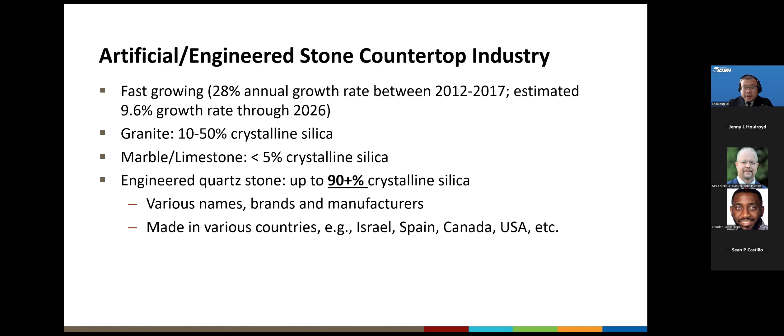So what we have been doing in NIOSH, I just want to present how we came along in NIOSH with our research tackling this problem. Shortly after the first case reported in the US in 2014, we had an HHE request. We did this health hazard evaluation in a relatively large fabricator shop. And the key finding was that the workers using handheld grinders with a traditional water spray wetting method had the highest exposure. You can see the number highlighted here, about 121 micrograms per cubic meter. At that time, OSHA's PEL had not been updated yet, but this was still higher than the then PEL. Of course, more than double the current PEL.

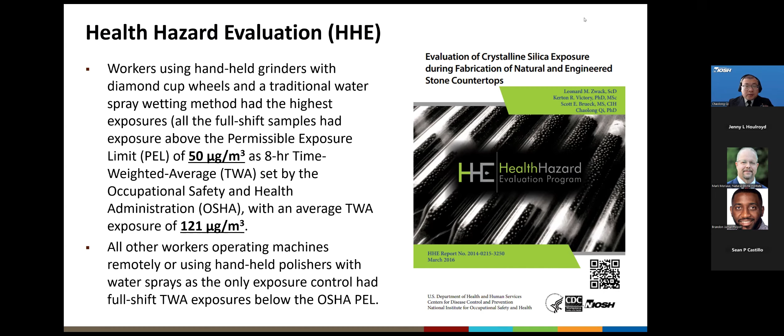And we also found that workers in other tasks, such as operating machines remotely or using handheld polishers with traditional water sprays, their exposures at that time were below the OSHA PEL. So we tried to focus on these 2 tasks, even though for the polishers at that time the exposures were below the PEL, they were still close or relatively high compared to the tasks that only work with remote-controlled machines.

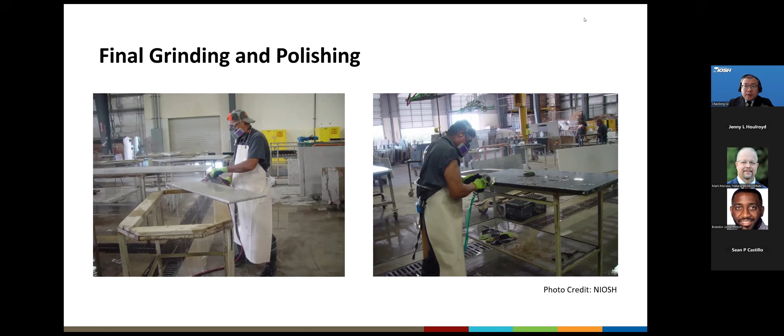So it's not a total surprise that these workers had higher exposure, because you can see their task is close to their breathing zone. So whatever they are working on, the emission from the tool hitting the stone slab may readily reach their breathing zone.

So in NIOSH, we did some additional in-depth field surveys. One question we wanted to answer at that time was whether working with those engineered stones that had higher silica content can really lead to higher exposure. Intuitively, the answer is yes, but we wanted to have real samples from the field to demonstrate that.

So we designed these short-term task-based sampling for both grinding and polishing tasks. These samples were taken between 20 minutes to 2 hours. We tried to focus on the task when they were working on one type of stone, but that's not always possible because their pace was really fast. So they changed different stones during that sampling window. But we still wanted at least 20 minutes sampling so that we could collect a quantifiable amount of crystalline silica.

So here are the results. As you can see, indeed, when they were working solely on the quartz stone, their exposures were so much higher than the OSHA PEL, which is 50, right? And in the sampling period when they were working on a mixed type of stone, meaning part of the time they were working on granite, part of the time they were working on quartz stone,

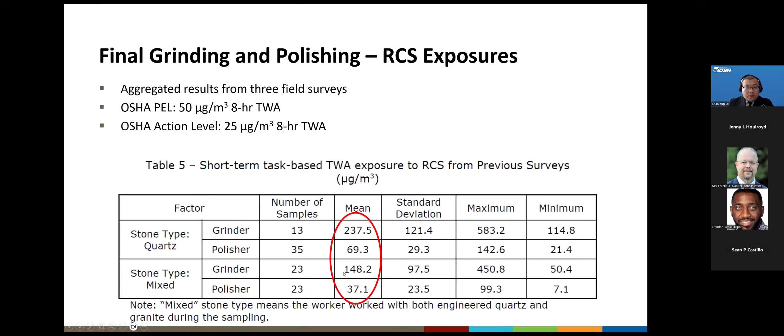their exposure was significantly lower, but still, all of these results were either close to or much higher than the PEL level. Obviously, we once again saw the higher exposure from the grinding task. You can see this level, even when they were working on a mixed type of stone.

So now let's move on to what we have been studying on engineering controls. For all the engineers and the industrial hygienists, we have our own toolbox, right? So we come to our toolbox to pick up the controls and see how they work. For dust emission, the two most used controls were local exhaust ventilation and the wet method. So the first idea most people thought was, why not combine them? Let's use both of the controls and see how they work together to control the dust, in hope that 1 + 1 either equals 2 or better, larger than 2, right?

So Dr. Johnson and Dr. Phillips from the University of Oklahoma were pioneering in this research. You can see on the left and the middle section of this slide, they published these 2 papers studying the combined control from a wet method and local exhaust ventilation for a variety of different tools. The results, surprisingly, were a little mixed. For some tools, they did find the combined control effectiveness was better. But in many tools, the combined results were even poorer than just one control alone.

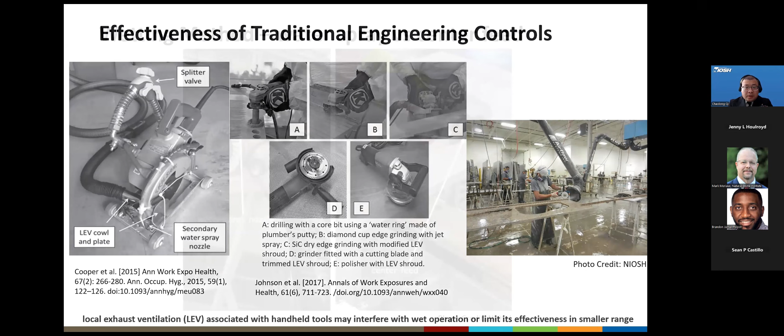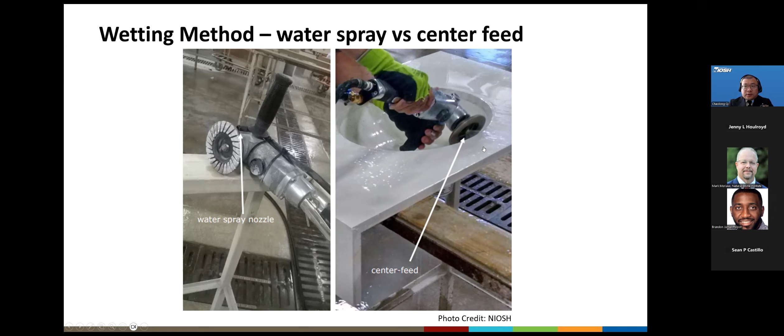So we did some field surveys about worker exposure using either tool. The results came back that both of them were poorly effective in terms of reducing worker exposure. At first, this was a puzzle for us. I actually received inquiries from employers, from a consultant, an industrial hygienist from the field. They were asking, our shop really operates in very wet conditions. We use a lot of water, and the floor is cleaned with a lot of water as well. But how come our worker exposure was still high?

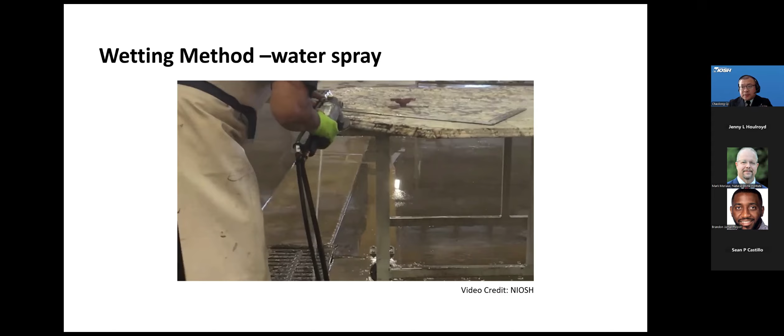After some observation from the field, we think we perhaps found the possible reason. I will use a few videos to demonstrate that. The first is about the water spray wetting method. You can see from this video, it's pretty obvious, right? I know I perhaps cherry-picked this video. Not all the time the workers neglected where the water was delivering, but for some tasks, they were really paying attention to the sophisticated surface, the edge they were working on. They may not have the highest attention on where the water was delivering.

And a lot of times the water shoots to the ground directly without wetting the surface as it's designed to. So the end result is that there may be a short period during this operation that the surface was dry, so it ended up with some dry operation.

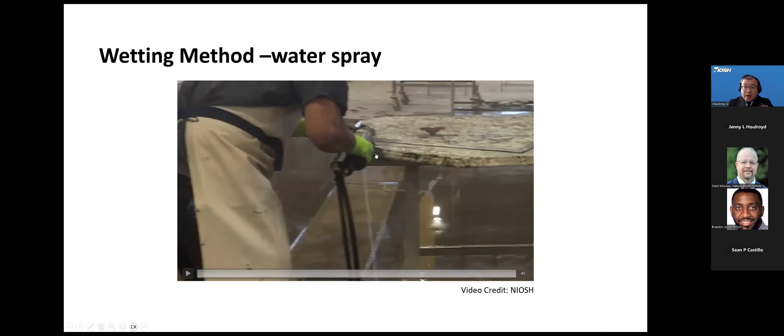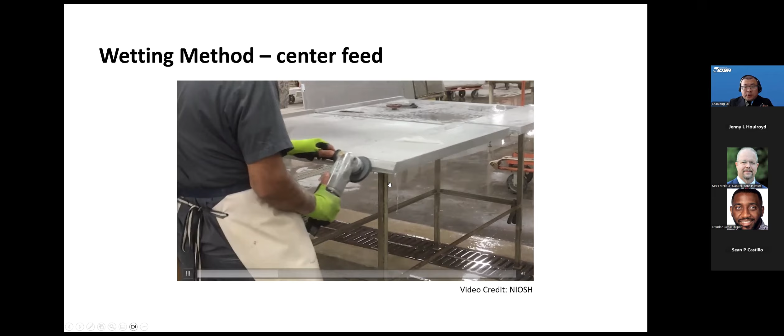Same observation happened for the central water feed approach. Before we start, I can point out that the relatively bright area on the surface, you can tell they were dried, and the relatively darker area here, they were wet. So you can see along the video the dry dust formation from the operation. And you can see the worker actually paused a second to intentionally wet the surface. And then still, you can see the dry dust formation and the area constantly gets dried again.

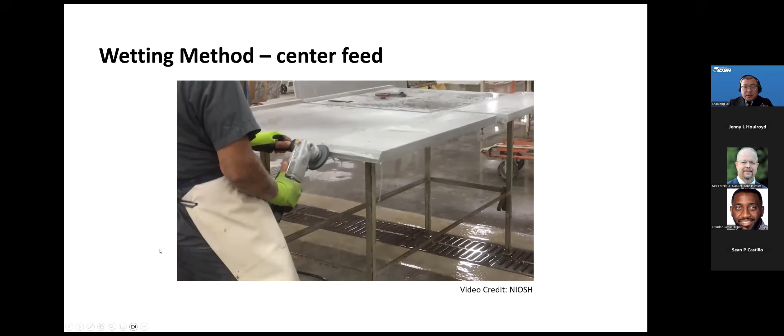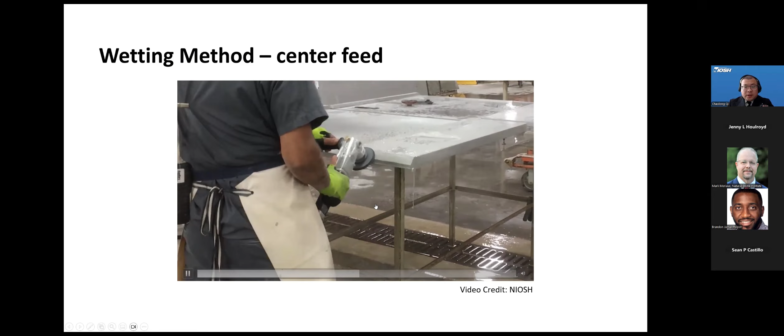This is because the 3 tiny holes for the central water feed are just so restrictive. They cannot deliver enough water to constantly wet the surface. And the fast spinning grinding wheel works almost like a fan that quickly dries the surface with the limited amount of water there. So again, it resulted in partial dry operation, even though we provided the water throughout the process.

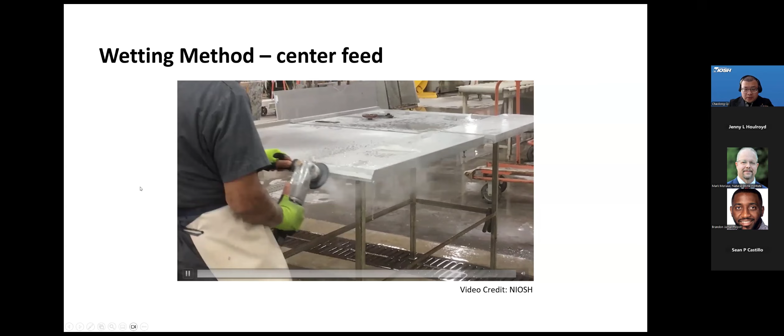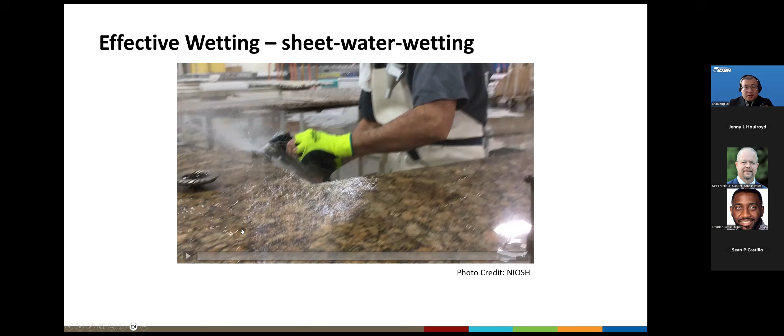So our immediate thought was, if these 2 methods were not effectively wetting the surface, what if we provide effective wetting and see whether that can suppress the dust enough to have the worker exposure below the PEL. So we came up with this sheet water wetting method. It's basically just a water source outside of the tool. We know that those incorporated on the tool seem to have trouble. So we provide additional water outside the tool to constantly wet the surface. We know for sure we are wetting the surface continuously and effectively. Let's see how it works.

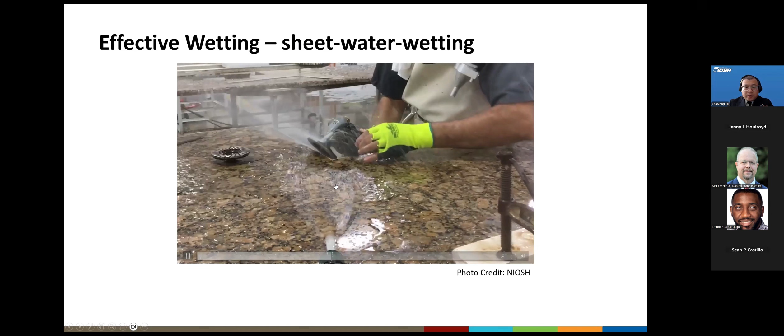So in this case, you can see it's basically just a water hose on the opposite side of the working area, constantly feeding water toward the edge. The purpose is that, one, it's constantly wetting the working area; second, it continuously flushes away the sludge or dust settled in the area, which would otherwise be there without this sheet water wetting method, right? And then we prevent them from being dried and reaerosolized later. So you can see in this case, we have the surface constantly wet.

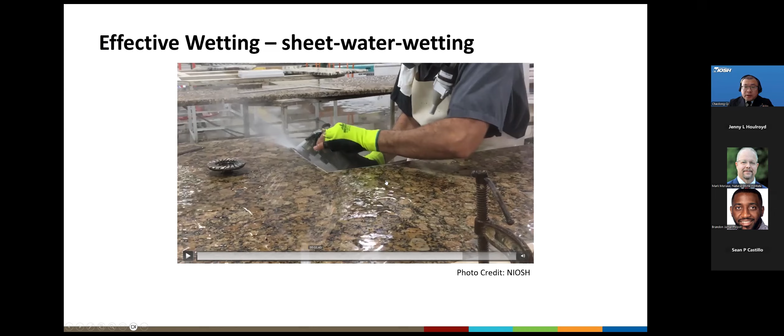Another point I want to make is the reason we didn't feed this water hose directly right at the edge was that we try to have this sheet formation so that it has a relatively gentle coverage of the surface. The purpose is that we don't want aggressive collision between the water and the grinding disc, because you can imagine it will create a big splash.

And that may bring a lot of mist that may contain silica dust that it captured. So if there is a strong collision between the water and the spinning disc, it may really splash this mist closer to the worker's breathing zone. And even if they are not in the breathing zone, they splash and aerosolize in the area and become airborne dust later. So that is another point we want to point out for the sheet water wetting method.

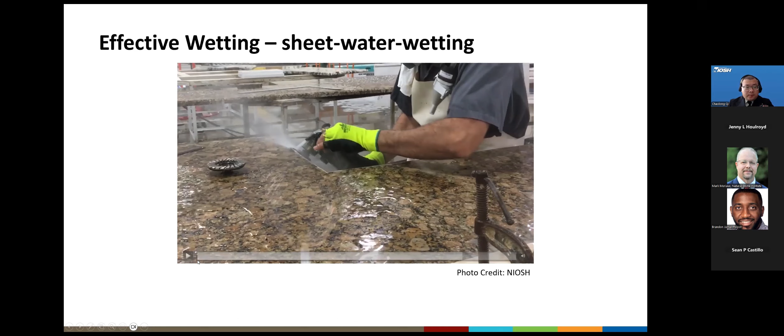So the results were really good, that we found that for workers' exposure using this added sheet water wetting method, their exposure reduced below the PEL level. All the results comparing the previous 2 wetting methods and this new sheet water wetting method can be found in this NIOSH report.

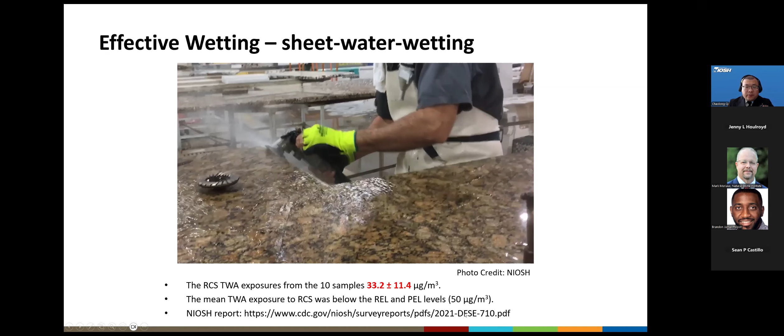Of course, you can have multiple ways of delivering a similar type of wetting method. This is the study conducted by Dr. Johnson's group, and they simply use a PVC pipe with one end capped and another end connected to a garden hose. And they drilled some 1/4-inch holes along the PVC pipe so that they can have this pipe cover a larger area of the slab. Of course, based on your need, you can adjust the length of the PVC pipe, maybe 2 to 3 feet, that workers can easily carry around.

So in NIOSH, our research is mainly to try to find what is feasible, what is working. I'm fully convinced from my experience that most of the time, people in the industry, once they learn the direction, always come up with better design, better approach. So I just want to throw this call to action there. So people in the industry, in the field, I'm sure you can come up with different ingenious ways of delivering similar sheet water wetting method.

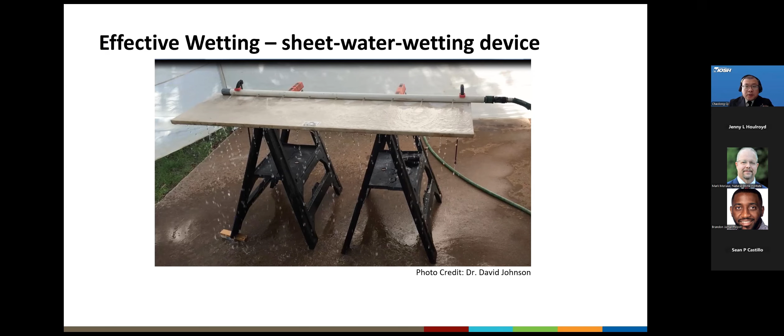So we didn't actually give up the local exhaust ventilation type of control, although we learned that we definitely will want to keep the wetting method, right? So the tool local exhaust ventilation may not be ideal. So what about other types of local exhaust ventilation? For example, the concept of containment and isolation, similar to a paint booth. So we modified a paint booth by modifying the dust collector, and these metal filters can collect moisture, sludge, and so on. So we implemented this with a partner to test how it works. The design consideration is similar to a paint booth, that we have about 100 feet per minute airflow velocity toward the dust collector.

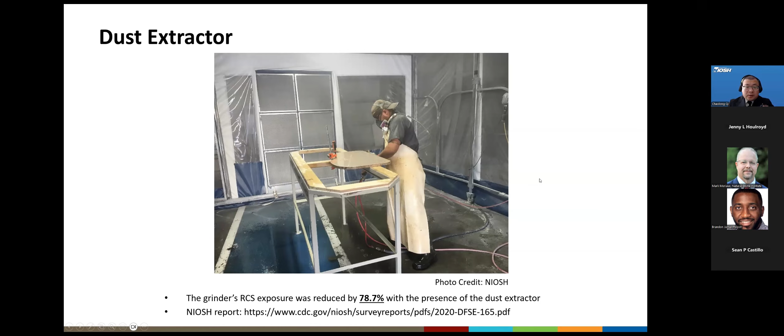And we tested the worker exposure with and without the presence of this dust collector in a kind of painting booth type of control, right? The results were really good as well. We found that worker exposure was reduced about 80%. Again, as I mentioned earlier, one thing I always found is that once we found a direction, a feasibility of our approach, our partners in the industry always come with even better solutions.

This is another example. Once we found that this 100 feet per minute flow can help capture the dust significantly, one of our partners identified another similar dust extractor. Instead, it used a water curtain to capture the dust and mist first, and then behind the water curtain, there were 2 layers of air filters to capture smaller and remaining particulates. Another difference from the previous slide about the isolation and containment approach is that the hooded area of this dust collector is relatively smaller, so it has a more open approach.

So it not only works as a local exhaust ventilation when the work was conducted close to or inside the hooded area, it also works as an air cleaner to constantly clean air in the surrounding area. So we can imagine for the workers' exposure, they have 2 main contributing sources. One is from their own task when they are actively conducting their task. Another is that when they were taking a measurement, moving the slab, setting up their tools, or simply taking a short break in the area, they were breathing the background air. So the silica concentration in the background air also contributed to their exposure. By having these dust extractors serve as an air cleaner that constantly cleans the background air, they can reduce their exposure in terms of 8-hour time-weighted average, right?

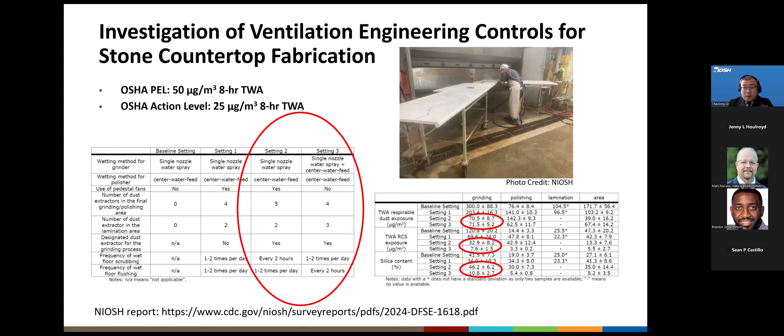We tested 4 different stones: the natural granite, the older engineered stone with crystalline silica in resin, and the newer formula or newer recipe with much reduced silica content. It's stone B, we call it here. And stone C is a recycled glass.

It's also engineered stone, but it's very different than the engineered or artificial stone we talked about the most, associated with higher exposure. This stone is made of recycled glass in cement, so it only has a trace amount of crystalline silica. We want to evaluate them and compare them in this laboratory setting.

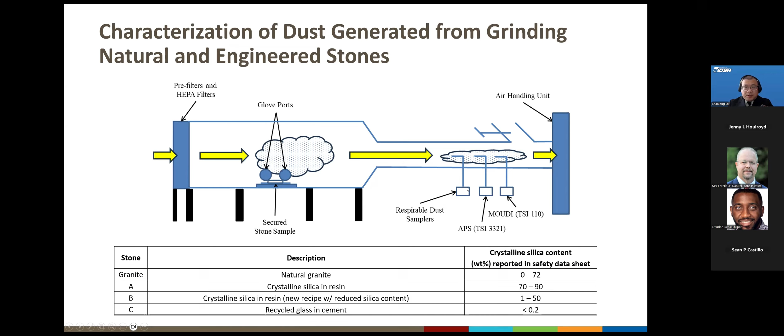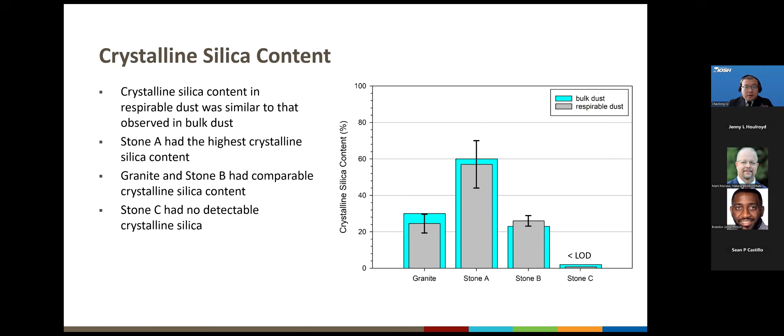Another interesting finding is that the bulk dust and the respirable dust had a very similar amount of crystalline silica content. This perhaps is useful information for exposure assessment, not for compliance purposes, but for evaluation of engineering controls and workplace practices. Instead of doing respirable crystalline silica analysis for all the samples, maybe by assessing the respirable dust and then assuming the silica content in the bulk dust, that can be a good estimation of the actual silica exposure.

So with the information of particle size distribution, the respirable dust, and the silica content in the respirable dust, we come up with a new term. We call it a normalized generation rate. It's defined as the mass of airborne contaminant generated per unit volume removed from stone, so that we can really have apple-to-apple comparison among the 4 types of stones we studied here.

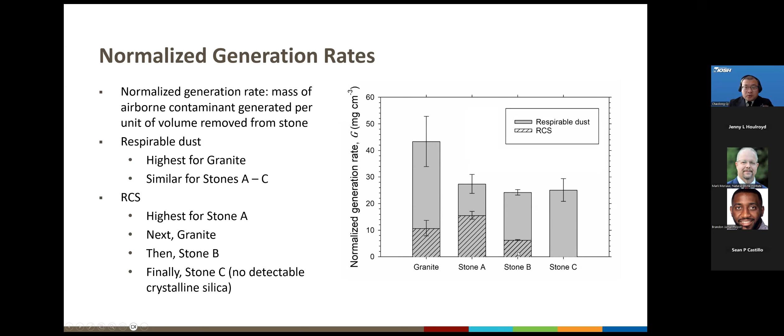You can see in terms of respirable dust, as shown in the previous distribution data, even they have the similar shape, the granite has the highest respirable dust generation, and the 3 engineered stones have very similar generation rate for respirable dust. Of course, they have different respirable crystalline silica content that leads to different generation rate for the RCS. As you can see here, stone A, not surprising, had the highest generation rate, followed by granite, and then the new engineered stone with lower silica content. Of course, stone C has no crystalline silica.

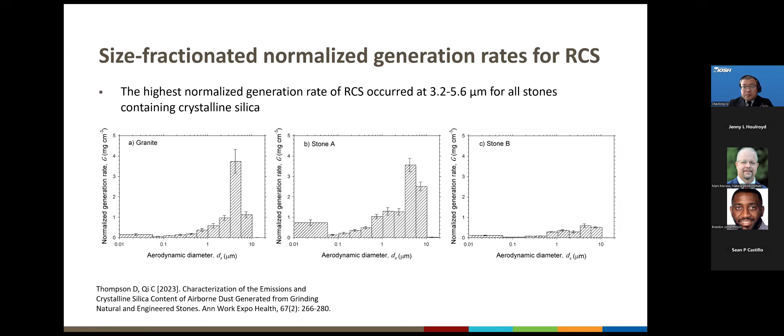We also had a cascade impactor, the MOUDI, to collect particles of different sizes and analyze the generation rate for different sizes in terms of crystalline silica. And the interesting finding here is that they all had the peak of generation rate for RCS around 3 to 6 micrometer. This may be valuable information when we design future engineering control solutions. We may want to target particles in this size range. This perhaps gives you the best results by considering all the design features.

So we mostly talked about engineering control, and the last laboratory study is perhaps a little bit more about substitution, elimination. So I just want to spend a few minutes on how engineering control falls into the overall control strategy. Many of you may be familiar with this concept of hierarchy of control, from elimination, substitution, engineering control, admin control, and finally PPE.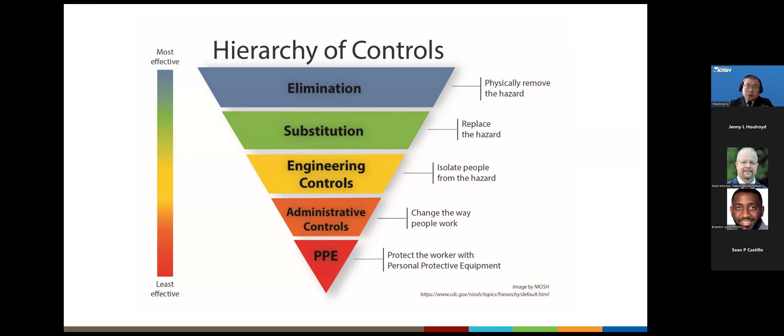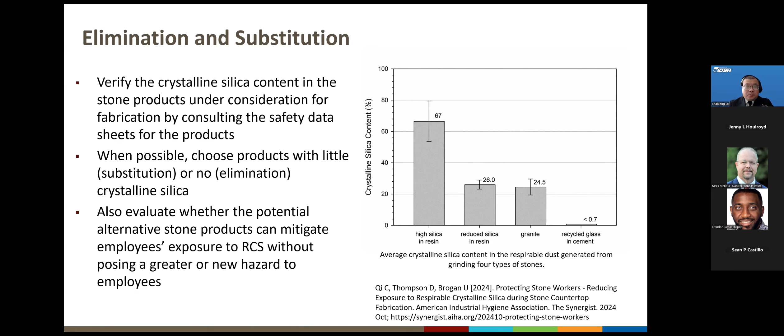We learned from the laboratory study that the silica content in different types of stones really reflects in their exposure. So in terms of elimination and substitution, of course, we recommend verifying the crystalline silica content in the stones, and when possible, choose those products with little or no crystalline silica that can really help reduce the exposure level. And of course, whenever using new stone products, we want to be mindful about the potential new or even greater hazard they may bring, so that perhaps is worth some further investigation.

And we talked mostly about engineering controls. The isolation and containment approach is still a valid one, although we later invested more in the local exhaust ventilation type of control, right? Of course, we learned earlier, definitely avoid dry operation, try to use effective wetting methods, and make the wetting method as effective as possible. And we didn't talk enough about the third bullet here, about improved design of the fabrication process.

Most shops have part of the fabrication process conducted on remotely operated machines, and only a small portion later in manual operation. If there can be improvement in the fabrication process, whether it's designed to make less work for the manual operation, or to improve the precision of those machine operations so that you leave very little for the manual operation, that can go a long way to reduce worker exposure, so they don't have much to grind or polish later, right?

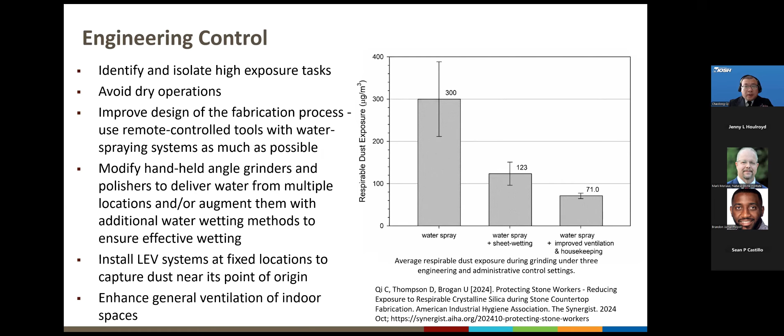We talked mostly about the effective wetting and the dust extractor type of local exhaust ventilation, so I won't repeat too much here. And we didn't talk more about the overall ventilation in the indoor space. This definitely can help reduce exposure. As explained earlier, those dust extractors not only serve as local exhaust ventilation, they also serve as air cleaners to continuously clean up the background air. So we have some results actually to back up this recommendation.

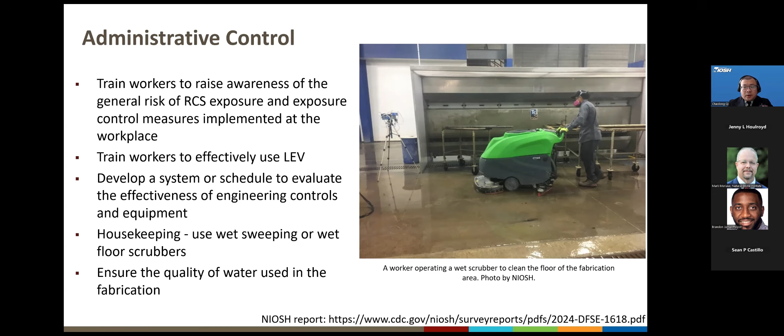So in terms of the installation, it's kind of a mix between admin control and engineering control. It's similar to the improved fabrication process as well, right? Let's try to do more in the shop, less in the field at the installation site, and I'm sure many of those have been implemented by a lot of shops already. So use laser measures to increase the precision, so you have less grinding and polishing to be done in the field, and use mock models and templates to ensure the installation can be done without the need of on-site operation.

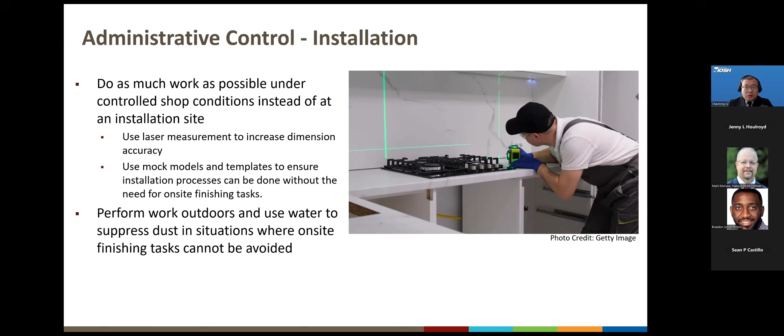If there's some small chance that you have to do some work at the site, consider performing it outdoors and use water, as we demonstrated earlier. Just simply using another water hose to provide additional water can help reduce the exposure. So this really comes a long way. At NIOSH, we have conducted this research over the last 10 years. We conducted multiple field surveys, published in journal articles and government reports. And more recently, there was a Synergist article last October summarizing a lot of the same information presented today.

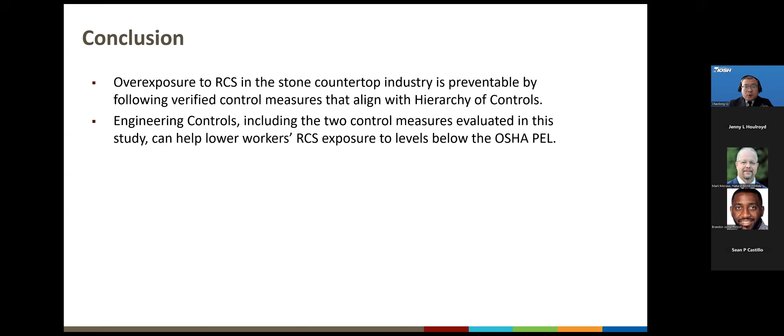In conclusion, the overexposure to RCS in this industry is really preventable by following all these verified control measures, following the hierarchy of controls. And engineering controls particularly, including those two control measures we discussed earlier today, can really help lower worker exposure to levels below the OSHA PEL.

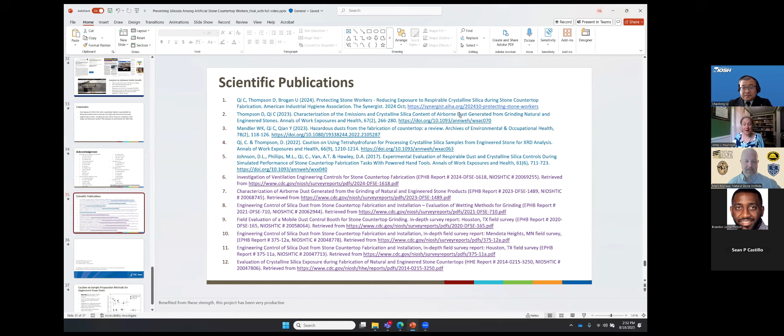Thank you, Jenny, and thank you, Dr. Qi. I'm going to try to share my screen now. Can everybody see it? Yes, now? I hope. It is coming along.

There we go. We got it. We're good. Very good. Okay. Let me make sure.

So, yeah, thanks to Dr. Qi for pointing out that engineering controls can be an effective method to reduce exposures for these shops. I happen to reside within the state of Georgia, so thanks for all you do in the state of Georgia, Jenny and team, for protecting the businesses here, me personally and all my local friends. But I do get the opportunity to visit shops all over the country on a regular basis.

And since you mentioned California, these images here come from a shop down an alley in California. I've actually visited this. These aren't my images. These were from a CBS News story about California shutting down some smaller hand fab shops in a very specific area in Sun Valley, California, in the LA area. But I've been in this area and there are multiple shops operating that used to look like this on a regular basis. This news article came out back in March of 2024.

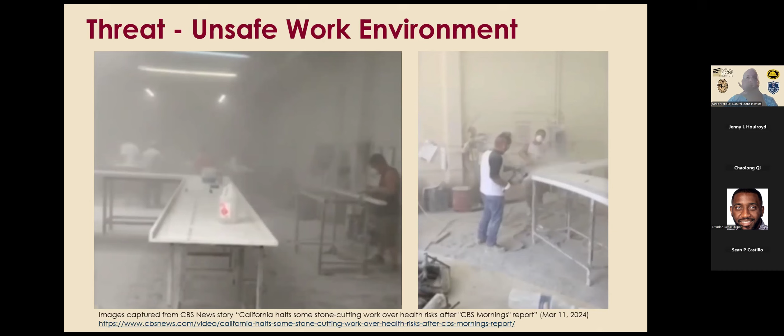And as I mentioned, I get to travel all around the country on a regular basis, visiting our members and non-members. And, hate to point it out, but our members are some of the best shops in the country. They're not the only shops, but more and more of them, like Dr. Qi has said, are involving these larger machines where they can do remote operation, get a higher level of precision, a bit more output. But you'll notice one thing in these photos that I've taken in shops. These are large production shops, one in Oregon, one in PA.

You'll notice the floors are not just wetted, but you won't see large puddles of slurry. You may see little bits here and there, but you can see the raw concrete floor itself. We joke around and say that shop's clean enough to eat off the floor, but you'll notice one thing in all these photos of good shops: they're all wet processes. They're overall clean and organized. Even these high production shops will have noticeable safety signage, SDS books available and visible in the shop. Some of them may be requiring respirator use when they've been tested and are above action level.

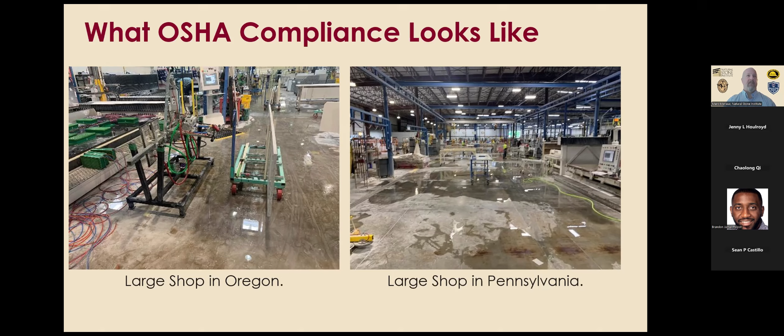But it's not just the big high production shops. There are other members in other parts of North America. One in Ottawa on the right, and these are the guys doing the hand polishing, the finishing. Look at the floors again. They're still very, very clean and constantly wetted. And when we say wet shop, we don't just mean water at the process, like Dr. Qi had pointed out. Regular wash downs prove to be the most effective. Wash these floors down, get the slurry and sediment into a collection system where it can be filtered out and away from the employees.

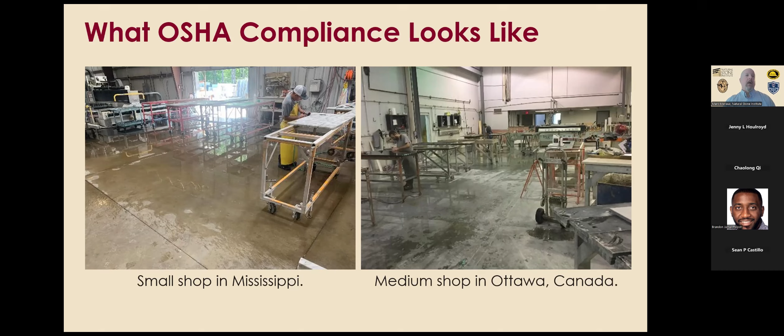I was glad Dr. Qi showed it because these are more supplemental engineering controls over and above for our shops who are having their air monitoring and testing done. If they get close to the action level or the PEL and want to bring it down just a little bit, these are devices that aren't terribly expensive. Those filter walls that Dr. Qi showed can be a few tens of thousands of dollars.

These devices, just a floor scrubber machine, you can get small walk-behind ones instead of the ride-on Zamboni style. And another one is this mobile HEPA air circulator that uses HEPA filters and constantly removes those contaminants from the air. It can be used to bring those exposure levels down slightly. These tools alone aren't going to make a shop safe instantly, but if you're close to those exposure levels and want to bring it down another notch, these are helpful devices to look at for your shops.

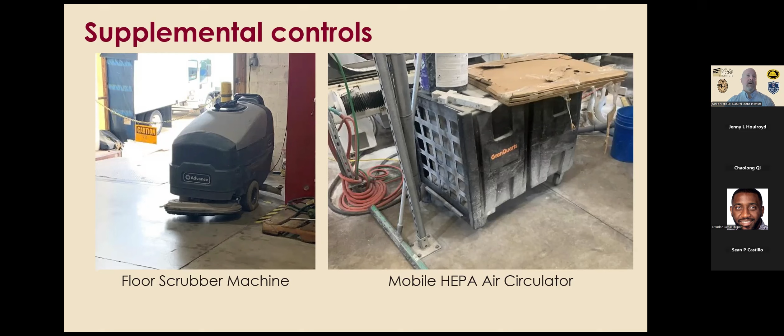Another thing I'd love to encourage all the fabricators out there to do is to learn more about silica safety.

Dr. Houlroyd and her team have some great education they put together a couple years ago. We do as well. At the Natural Stone Institute, we have a silica and slab safety certificate training. It's currently about 5 hours of training. We're going to trim that down because some of it's a little redundant, but beginning next year, that'll be shortened, I think, to around 3.5 hours of training.

But we cover the two primary safety topics that are specific to the stone industry. One is that silica safety we're all talking about right now. The other one is slab safety, slab handling, because unfortunately I hear about incidences where the slab handling incidences aren't just injuries. In many instances they are fatalities. So people get killed handling slabs or mishandling slabs. So we coupled both of those training topics together in this certificate.

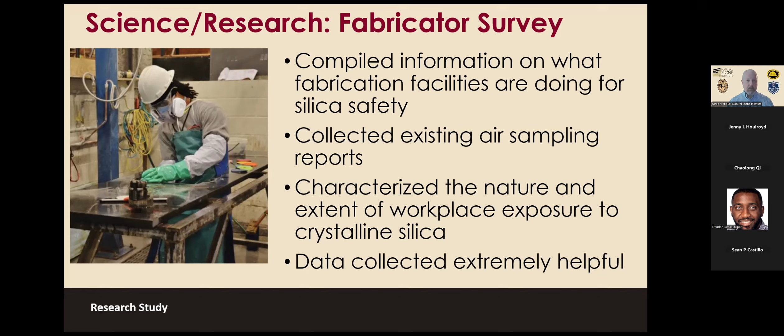One thing we learned very early on in the collection of data with Yale was an overall lack of consistency among air sampling. You would think the certified industrial hygienists across the U.S. would all do things in a similar fashion, but whether it was individual CIHs, state agencies like consultation agencies, even across the U.S., all had varying levels of detail captured during these air sampling events, whether it was about products, specific activities, engineering controls, or PPE being used. We just didn't have full reports from all of these different air sampling events.

So one of the things we created, to be helpful for our fabricator members, was a guidance document for fabricators so they can better understand what that sampling process should look like, what information they should provide during one of those sampling events about the materials being processed that day, whether this is a normal procedure or something out of the norm. But we also created, rather Yale did, because they're more versed with the CIHs, a guidance document for the sampling firm or consultant who performs that. So it'll have a lot more details into what we hope a sampling firm or consultant might gather during one of those sampling events. This would really help in the future in understanding the risk and the effectiveness of the available controls that are being used and are out there.

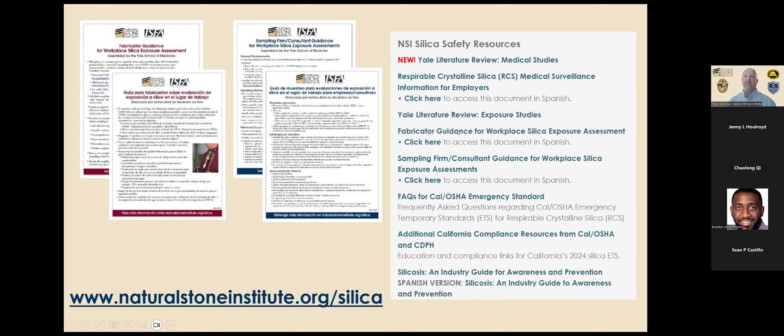I do want to say no one group's gonna solve this issue alone. It's not Dr. Qi. I wish you had the super brilliant idea to solve this tomorrow and make everybody safe. I wish I had that idea, but we don't. We're all going to have to work together to find a solution to keep these workers safe. More work is still needed to educate the fabricators and the workers about existing risks and best practices. More research is needed. Thanks for all the stuff you've done over the years and continue to do at NIOSH and agencies like that. More research is needed to identify the primary source of the risk, whether it's activity-based or material-based or a combination.

More work is needed from the medical community. Some of the problems in California and Australia were medical professionals not identifying this as a silicosis risk early on in the patients they were seeing. They misdiagnosed them, unfortunately, as COPD or some other lung issue. So more work's needed in the medical community to better identify these cases early so that workers who do get sick get the proper treatment. And then more work is definitely needed from enforcement. The enforcement teams in the states and the regions around the world need to get out there and make sure that the employers, like those dusty, dirty shops we saw in those opening slides, are following the rules and complying with current standards out there.

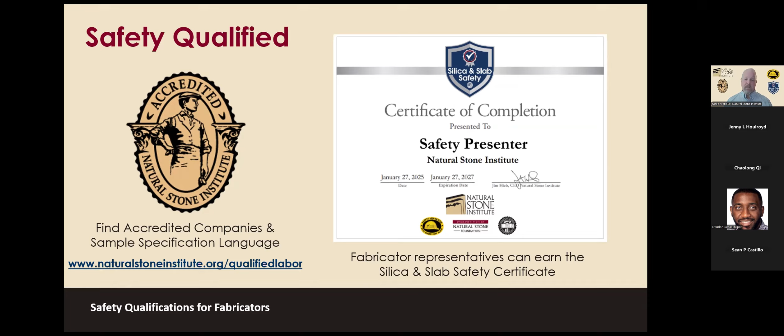One of the things we can assure people with is one of the programs I lead. We have a credentialing program called accreditation, and all of our accredited shops have undergone voluntary safety audits from their state agencies. The other thing, on the right, is the certificate of completion for all the individuals and workplaces who have completed that Silica & Slab Safety certificate course. It's just another verification that the fabricators are doing all they can to understand the risks and keep their workers safe. So what can fabricators do?

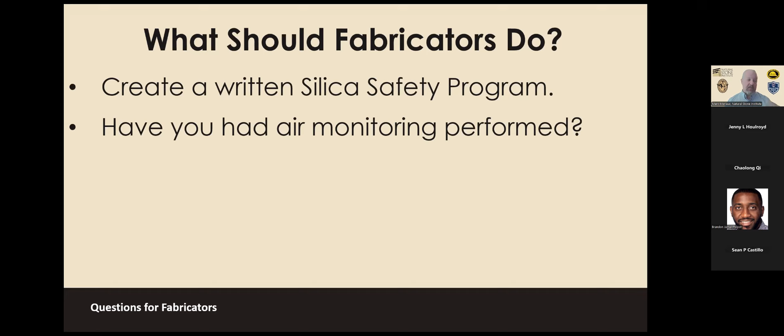Create your written silica safety program. If you don't have that in place, one of the available resources is a boilerplate silica exposure control plan. You can start there if you don't have one yet. You can work with a state agency like Georgia Tech, their state consultation, or the one in your state. They will help you develop a general overall safety program or a silica safety program. Do you have air monitoring done? You can work all wet, but if you don't have air monitoring done, you don't know if there's still a risk in your shop. You have to have that air monitoring done to know if there is a risk or the extent of that risk in your facility. So get that air monitoring done.

Have you had your employees medically evaluated? And when I say that, I don't mean just fit tested for a respirator and they're good. I mean, there's additional liabilities. Imagine when you hire a worker who has years of experience working at other shops, you may not know what the level of safety was at those shops.

When they come to work at your facility, you're now assuming a healthy worker or possibly unhealthy worker. So we recommend that you have your employees medically evaluated, have a chest X-ray, chest CT scan with a B read, so they can see if there are any early symptoms of silicosis present in that worker. I know Concentra is one of the nationwide workman's comp or healthcare providers. There are other ones, but you want to have those employees medically evaluated so you have a baseline for where they're at, and then do that on a regular basis.

You can also do things like lung function tests so you can see any degradation in lung function over the time while they work for you. And then what are the safety protocols? What engineering controls do you currently use? Are they the best available? Are they the newest? I heard Dr. Qi refer to some of them, and you guys are the wizards out there along with us.

We look at different shops around the country as new technologies are developed or new strategies emerge. We want to share those as quickly and as early as possible to keep everybody safe, and some of those are those larger machines. Some of them come with enclosures and doors to isolate the risk from the workers nearby, but sheet wetting, all those strategies, look into them and use the ones that'll fit within your shop.

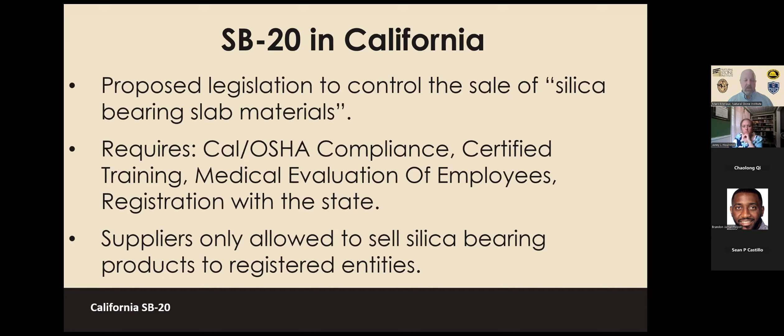I've got my fingers crossed. I'm really hopeful because there's a lot within industry that are backing this. They think it's a really smart way to control the product, and keep the at-risk product away from the unsafe shops. But we'll see how that goes in the next couple of months. With that, I'm going to wrap it up and turn it back over to you, Jenny.

Thank you, Mark. All right, so now I am a little bit biased because I work with Sean and Brandon, but Sean and Brandon are two amazing industrial hygienists that spend an exorbitant amount of time working in stone countertop fabrication shops, and really working with the small businesses and helping alleviate barriers to protecting workers. So without further delay, I'm going to turn it over to Sean and Brandon.

And so we heard a very technical presentation from Dr. Qi. We heard Mark share the industry professional association perspective. And now Brandon and Sean are going to tell you what we see, what we hear from businesses, and how we're trying to help protect workers.

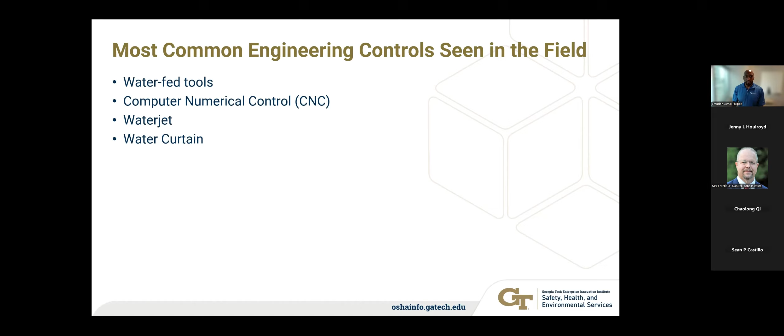So the next few videos are just going to be of different engineering controls that we see, and you could play it, Sean. So as you see, this is just the use of a water-fed tool, and you can see the amount of water that is being used in this process. And then later on in the presentation, we'll see how, with the water-fed tools, housekeeping will kick in. But as you see, this one is more of a center-fed water-fed tool. We can go to the next slide, Sean.

And this is just another example of using a water-fed tool. But one of the things that we want to really pay attention to, if you look at the respirator that the employee is wearing, you'll see that there is a buildup of dust on that respirator. So we're using a whole lot of water, and yes, it's capturing the dust particles, but what happens to those particles when the water dries up?

So you have situations like this where the dust will be left on the respirator or in other aspects of the shop that could potentially cause problems, not just for the people actually fabricating, but for the people who are working around those areas.

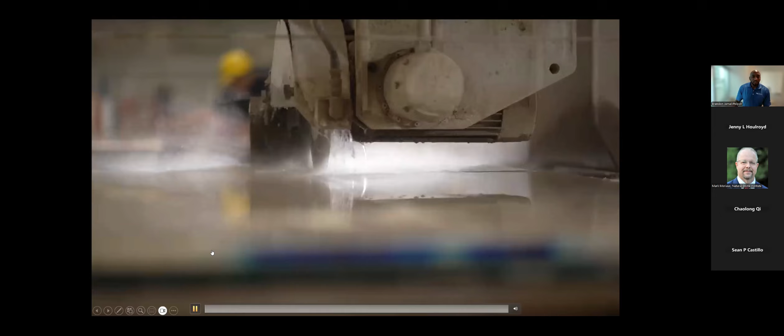So this is just the use of a CNC machine. And I said that the water is being distributed. And also these are the type of machines where, in a sense, we can set it and forget it. So the employee can just set what the cut should be, and then they don't have to directly stand there while the cut is being made. And we can go to the next slide, Sean.

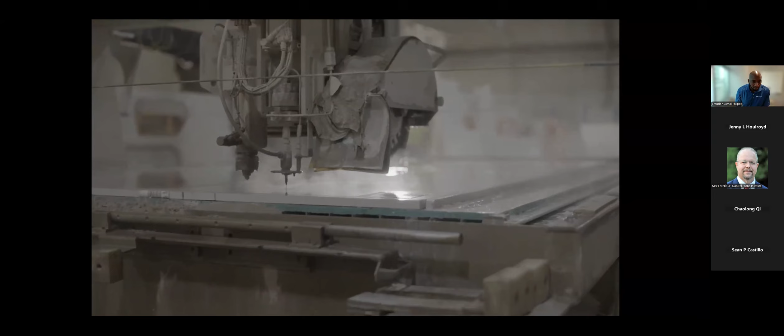And then we have a water jet system. So it's just basically a really strong use of water to make the cut. So once again, we can set the type of cut we want to make with the computer system, and then allow the machine to do the job. And this just helps eliminate the amount of fabrication that needs to be done in later stages. So we're not having to make those cuts.

The employees are not having to make those cuts themselves. They're able to just allow the machine to do the work, and then from there they may have to do some cleaning up, but the amount of time working on that slab is a lot less than if they were just standing there and having to make the cut themselves.

And then we also have a water curtain. So we don't have a pretty video of a water curtain like the other ones. The videos that you just saw are actual videos that were taken in the field. Some of them were a bit staged from when we were doing our Susan Harwood grant, where we created training modules for silica and silica exposure in this industry. So that's where a lot of those videos came from, and some of the videos actually came from us just being on site and what we see day in and day out.

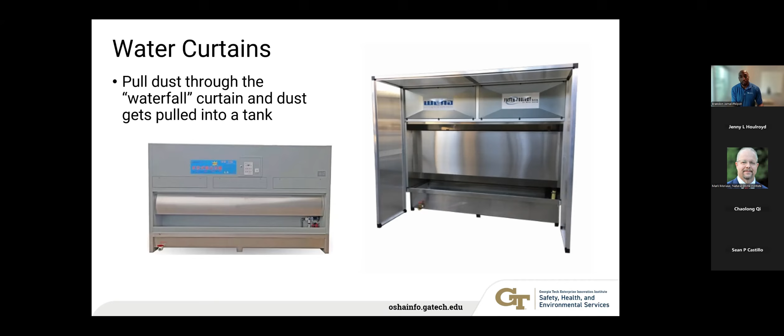But this is just the water curtain that Dr. Qi showed earlier, and as he said, it's just pulling the dust through and using the waterfall aspect in order to contain the dust particles.

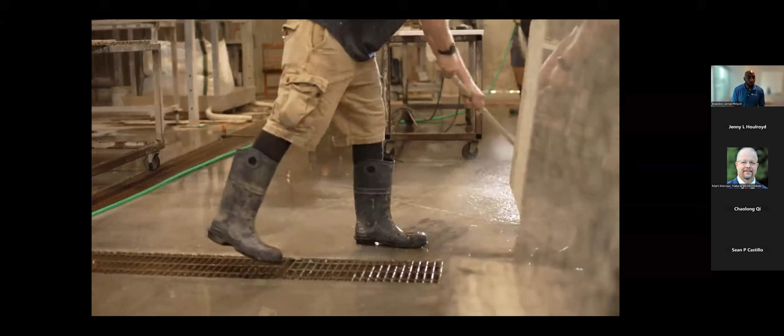So this aspect is just really leading up to having good housekeeping. And as you see in the video, as Mark said, it's important to make sure we are wetting down that floor. So right here, they're just wetting down the floor to move the dust that has settled or the sludge to those grates. And then from there, it will go to their water recycling system.

So the water recycling systems are just so important because, for one, with using so much water, we will probably have very high water bills if we're not trying to recycle that water. In the water recycling system, we're separating that dust from the water, and then we're able to reuse the water. But we want to be careful about any of these engineering controls. We want to think about maintaining them.

And with the water recycling system, if we don't have that system in place, we're not able to remove that dust. So once the water dries, all that dust will be left on the floor, which will cause additional hazard, maybe not for the people who are doing the polishing or the grinding, but for those people who are standing around.

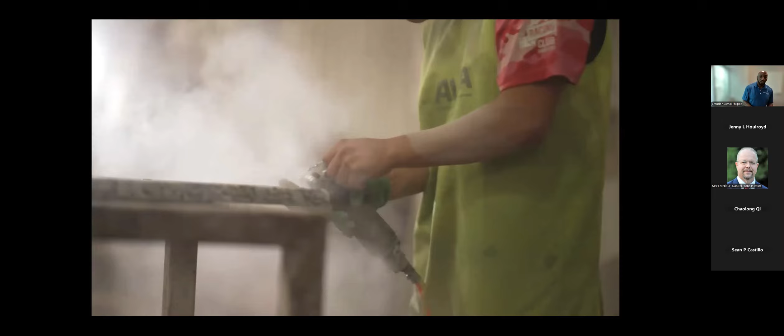So the next few slides will show you when engineering controls are not in place. This is the same employee that we saw earlier when he was using the water-fed system. This is a staged video. We want to see how much dust is generated when we don't have that water-fed system. And as you see, the cloud of dust that is being produced from not polishing that long. So this is what you can see if you're not using that water-fed system.

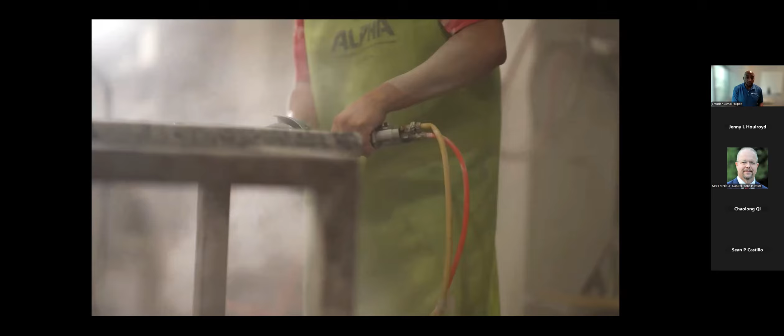So when we're training employees, we want to make sure they know that no matter what, whenever they are doing any of those tasks, they have the water turned on, because you see that this is a water-fed tool, but he has the water turned off. So making sure that they understand that they should not be turning off the water at any point in time.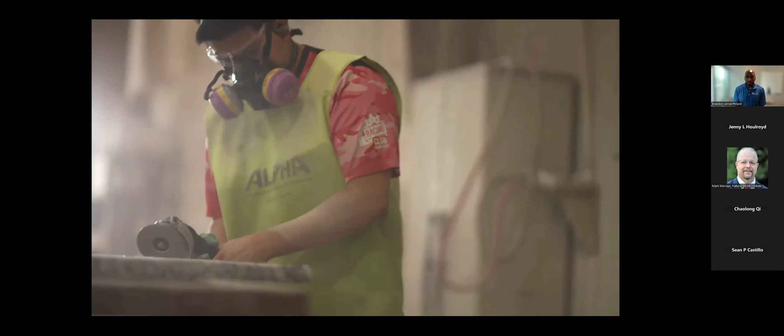So when we're thinking about making sure our employees understand that they need to properly use controls, we want to make sure that we are training them. If the tool is not being used properly and the water's not on, we don't need to be using the tool at that point in time.

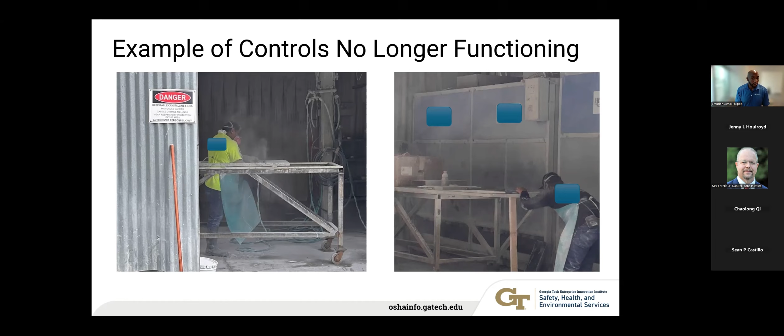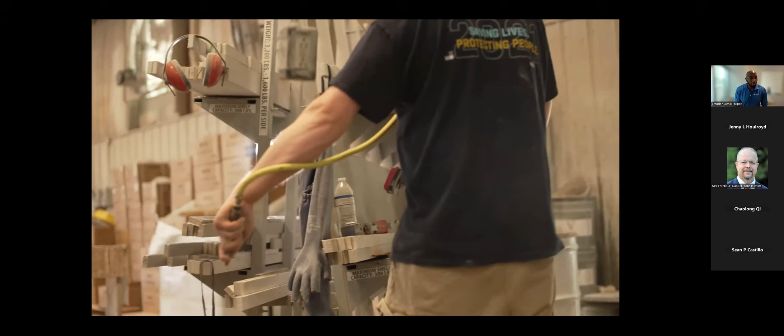And then, what happens when the water dries? This is another staged video showing that even with water everywhere, we can have a dust problem. This is just a random table in the shop where we used some compressed air, which we should never be using when we're working with silica. But you see how much dust is built up on that machine.

They may do great housekeeping on the floor, removing the dust from the floor, but that dust also travels and will land on other parts of the facility. So we want to make sure that your employees really understand that the water will dry up, and we need to make sure that we are cleaning things down so we don't have this buildup of dust.

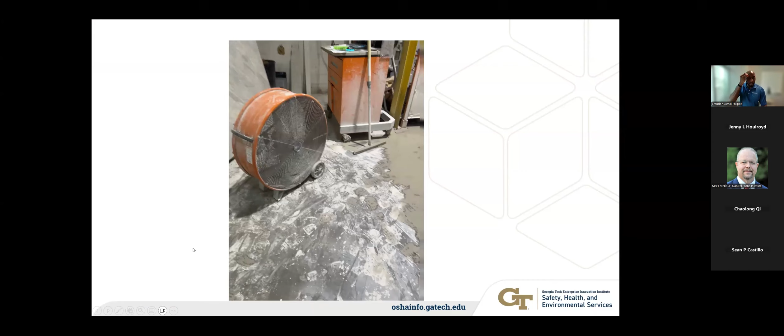And often when I go to different companies, people use fans as a relief for the heat, a lot of times in Georgia. So we want to be very careful about the use of fans. You can see it's kind of a wet but kind of dry area, with a lot of slurry. But if we have that dried silica, the dried dust, all that fan is going to do is blow it to a different area and possibly impact another employee.

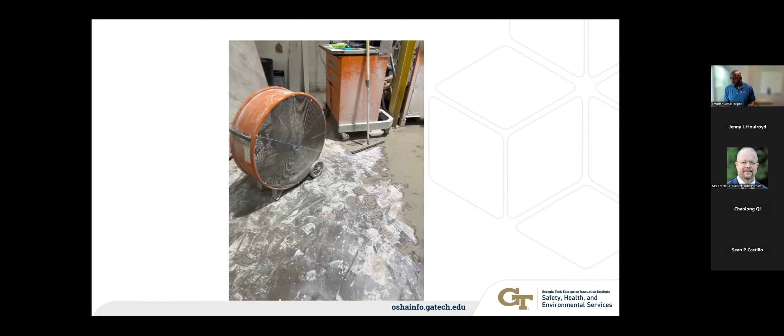Sean will get more into the paper that we recently published, but we saw that even different groups who were not actually doing any type of fabrication were a lot of times still exposed to silica above the action level, and sometimes maybe even the PEL.

So I just want to be mindful about the people who are actually doing the fabricating, but also want to be mindful about the people who are not directly doing the fabricating. And so a couple of resources that you may want to review. Jenny, if you look at the QR code, it will take you to the first paper, where it talks about some of the engineering controls in Australia. And then Jenny earlier put the link in for the paper by Dr. Qi about the ventilation and engineering controls.

But one of the quick things that I want to talk about is that controls are imperfect, and it may take using two controls or more to help reduce that level. And then just want to really make sure you're maintaining those systems to make sure they're operating functionally. As Dr. Qi mentioned, the airflow rate, especially with that water curtain, to make sure enough air is being pulled away so we are effectively moving the dust away.

And then we want to make sure that we're using the appropriate amount of water to suppress some of the particles. We want to think about what type of work is being done at that point in time, and make sure that we're staying on top of our housekeeping, continuing to try to have that shop wet, and using a squeegee or some type of scrubber to help remove some of that sludge and slurry. So when the water does dry, we don't have as much dust or settled dust present in the facility.

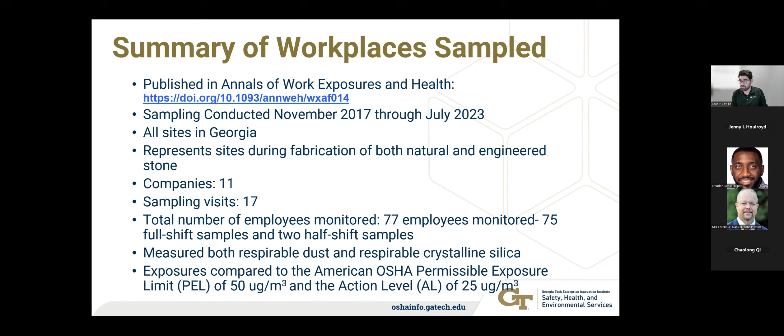As the OSHA consultation program, we are looking and relating to OSHA compliance, at least on the federal level, since we are in Georgia. And so a couple quick things about our results. So for around 63 employees who exclusively use wet methods, so we do generally see a good amount of wet methods in these small fabrication shops, we saw that 51% had exposures at or above the PEL, reaching as high as 370 micrograms per meter cubed.

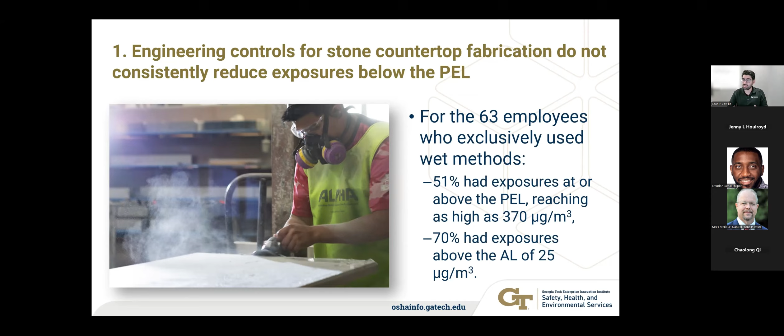And about 70% of all of the exposures were above the action level of 25. Meaning, if they're over that for 30 or more days a year, they have to do medical surveillance. You have to have a silica exposure control plan. And so a lot of that standard does come in at that level.

We also saw that there are differences, but we were having overexposures from small and large fabricators. And for us, our larger fabricators are 25 or more. The scope of consultation usually goes to about 250. We do some limited service with larger ones.

But with our small fabricators, we worked with about 6 companies, we conducted 8 visits, monitored 28 employees. And we saw exposure ranges from 9.2 to 370, about 50% over the PEL, 75% over the AL, or the action level.

And for those large fabricators, we're about 5 companies, 9 visits, so almost pretty one-to-one. Monitored 49 employees, so we did have many more employees just due to the amount on site. And our exposure ranged from non-detect to 5,100 micrograms per meter cubed. And those large exposures are dry exposures, so I'm going to talk about that very briefly too.

But about 55% over the PEL, meaning respiratory protection is required, and 71% over the AL, where we have to do medical surveillance, possible sampling depending on how you're going about the OSHA standard, and the actual X-ray tests.

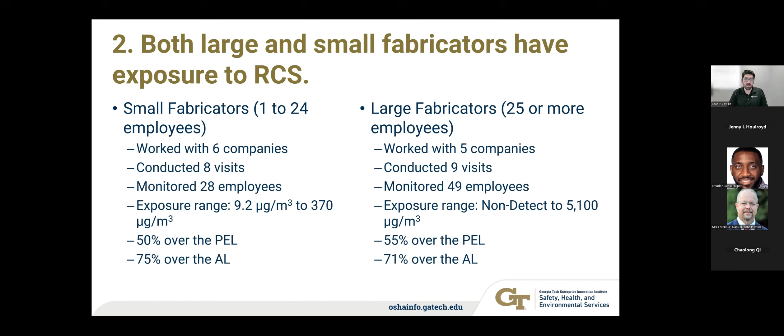So one thing I wanted to note, again, we're not getting deep into our paper for the sake of this. We could talk for a long time, and if anyone wants to reach out, please reach out to us. We'd be happy to discuss it with you.

I just wanted to highlight one company specifically and talk about the importance of everything we've discussed today with engineering controls. And so if we go to company 6, this is a company that we have gone to over the years a few times now, and we have seen changes in how they're working. And so, as Brandon alluded to, this is that company who had that water curtain.

First time we went out there, they had their water curtain, but it was not actively in use, and they were doing all kinds of dry fabrication in a back room. And so they were outside, they had some general ventilation, which is better than not. However, there were no wet tools and there was no local exhaust ventilation, and we were seeing heavy overexposures. So that was our site 6A.

We went back out again, that is our 6B site, and we saw that those exposures for respirable crystalline silica then went from 15 to 2,000 on site to 16 to 230. And I will tell you that 2,000 and that 230 are both for the fabrication tasks in that same area. And so there was still an overexposure for that site, but at least we saw just how much that exposure could be reduced when they were properly using their wet tools, right?

And then later on, again, it's important to know that when management changes, when employees change, when there's turnover, we went back out there a couple years later, did some sampling, and they were doing everything in that room dry again. And they had multiple employees in there doing all kinds of dry fabrication. And so we saw very large overexposures, very far above the PEL.

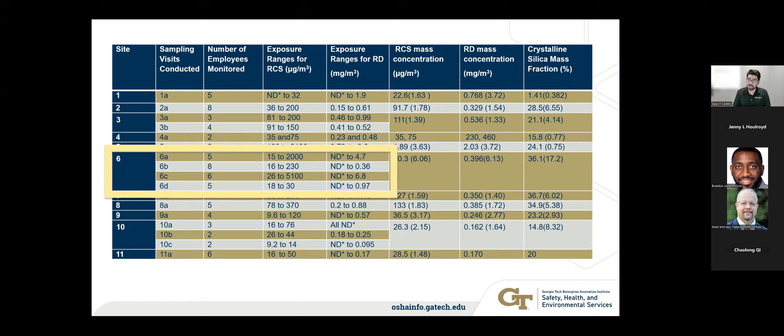I will leave the QR code to this study, but I just wanted to show you the differences that go when you have a functioning system that isn't in place, and then you decide to use it, and then lapses happen, and later on down the road, it gets cut to the curb. And then you have those overexposures again. So we want to be consistent with our preventative maintenance and our training of everyone to make sure that we are doing what we need to do.

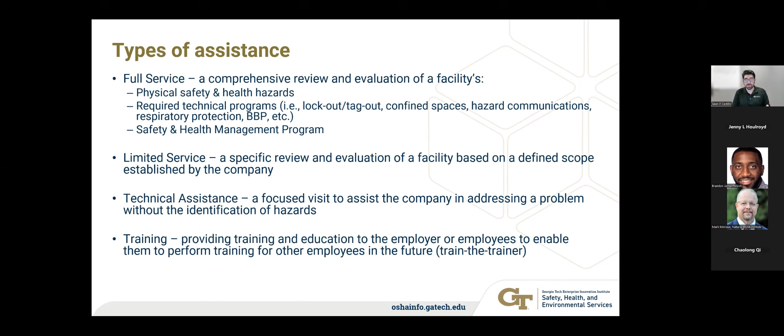We do offer other services besides safety, health, and safety and health management development, but we do have all of these resources. We offer resources on our page. So we have our trainings, we have all of our guides. OSHA has some really great guides for silica. Their small entity compliance guides will show you the silica control plans and their templates, as well as what Mark mentioned with the Natural Stone Institute with their exposure control plans, other sampling plans as well. So the resources are out there for your use.

So whether it's from us, Natural Stone, Silica Safe, OSHA, or other resources, please at least spread that awareness so we can start getting people aware to what silicosis can do and how it can change someone's life. But you do have help out there, whether it's from us or your industry partners.

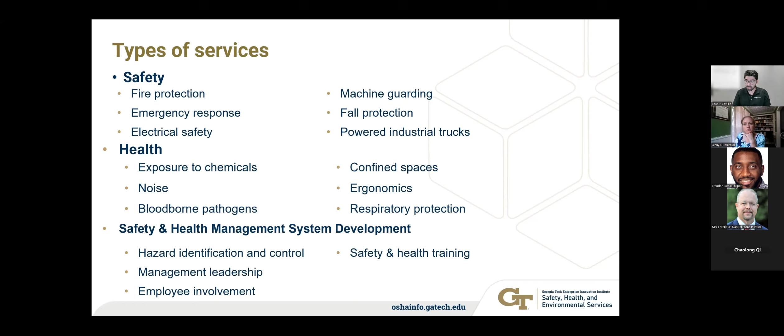And the last thing I wanted to mention, if you do go through the paper, the way we usually look at these kind of things, especially with exposure groups and how we know that polishers are usually going to have higher exposures. We all talked about handheld tools. We do have some of those higher exposures than a CNC machine. We don't want that to be the end all be all, however, because a lot of these small facilities that we go to, especially here in Georgia, oftentimes your CNC machine might be right next to your grinder, your polisher. You might have support workers on a forklift or who are doing other manual handling, but then they're standing next to a polisher. So it's not always just dependent on the task. It also depends on your vicinity when we're looking at all of those exposures.